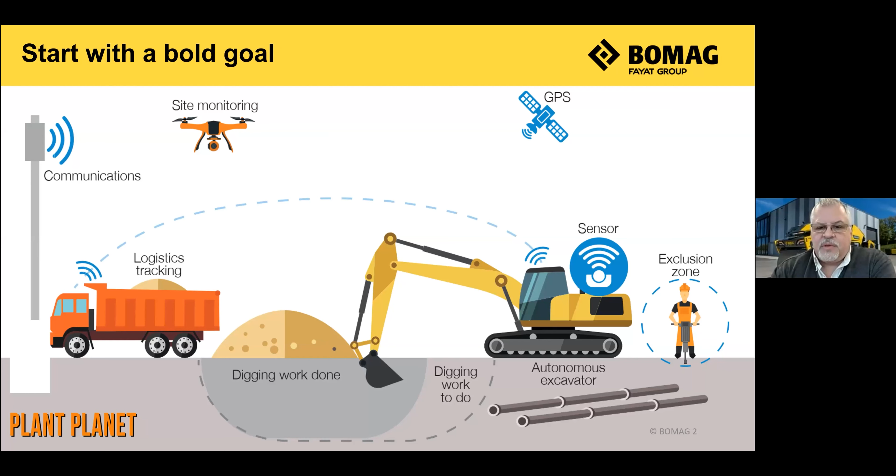In mid-2019, the construction industry and wider technology providers came together under the Highways England Connected Autonomous Plant Group. The goal is to make the site of the future a reality with a truly collaborative approach from all parties. With this bold goal also came a bold statement: the goal is to have autonomous sites as the norm by 2035 in the UK. This is a bold goal that can be made a reality.

The roadmap to the Connected Autonomous Plant goal was published in the summer of 2020. Some extracts are shown here. The ambitious target and goals along the way are set with key milestones identified. The cooperation of authorities, designers, manufacturers and contractors have made this document possible.

To understand the reasoning behind the CAP goal, several key benefits were identified. Efficiencies from enhanced machine control are well documented, proven, and adoption is increasing, but not yet the norm. Quality can be an easy gain, as it is not just about the quality of the job, it is the reproducibility and consistency of the results. Here automation can make a big impact with repetitive tasks. Speed gains in modular and off-site assembly are clear, as well as utilising advances in technology to improve efficiency on-site and reduce the rework required - the right first time approach.

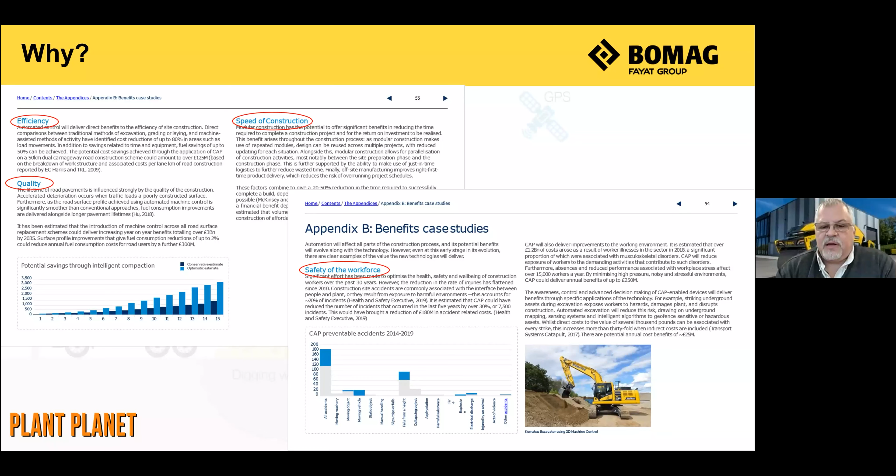Most importantly, and as we will see with auto braking, safety on the work site can be a huge benefit. Lastly, a point not shown in this section is that semi-autonomous and autonomous machinery can help address the shortage of skilled, experienced operators that is going to become a big issue as the number of mega projects in the UK increases.

Two weeks ago, TRL launched their recommendations for an off-highway automated vehicles code of practice. This is the next step in the CAP project. They held a webinar to introduce it to the industry, and it is now available to download and consult with online.

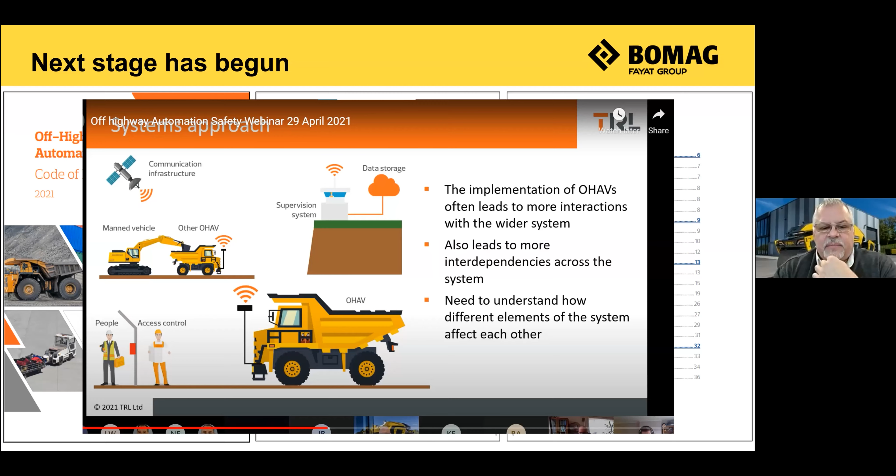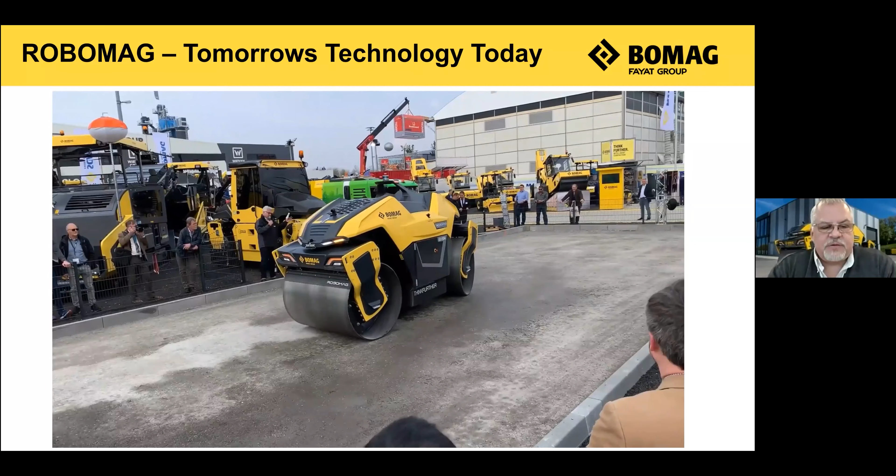Technology and the ability to build autonomous machines is already here. The concept of ROBOMAG, the machine you can see here, not only brings together sensor technology and GPS, it also brings autonomous compaction control of the drum, a technology of today. This is the debut of ROBOMAG at bauma 2019, and here it is working in autonomous mode with a geofence boundary set for safety. So this machine can run as a remote control unit, it can run semi-autonomous where it's told what to do, or it can just be told, this is an area, compact it to the maximum, and then finish. It's a concept, but it's using technology that is available and working today to prove that it can be done.

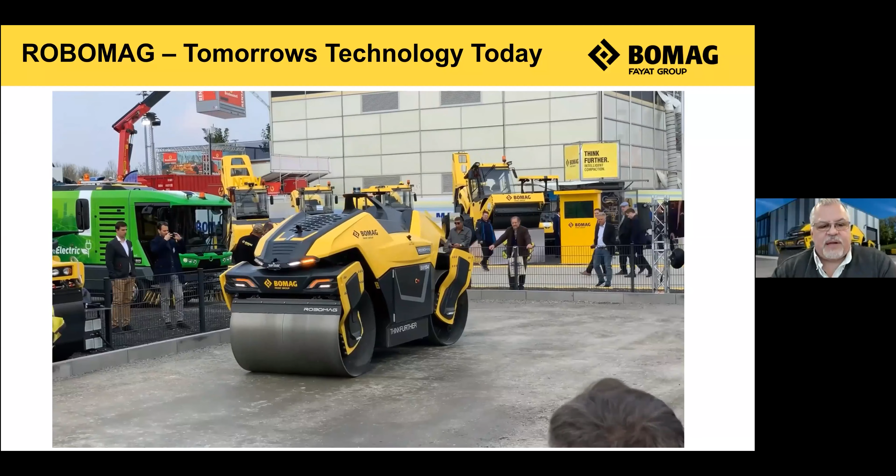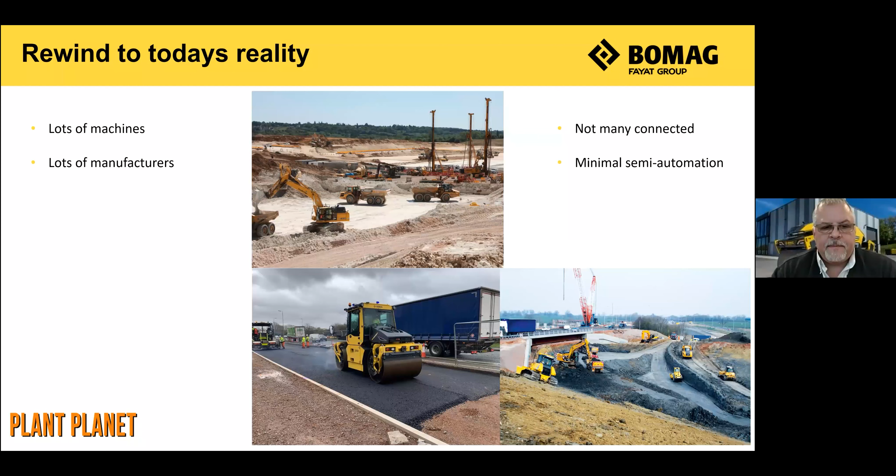To put the future in perspective, we need to know where we are today. So lots of manufacturers on the site, lots of different machines on the site. Very few of those machines are connected, and there's minimal semi-automation on some of the machines. For compaction, which is what we specialise in, the systems are method spec - basically tables that were written in the 50s and 60s, and this is how it's worked. There are few operator aids and very few results are recorded, and very few machines are connected.

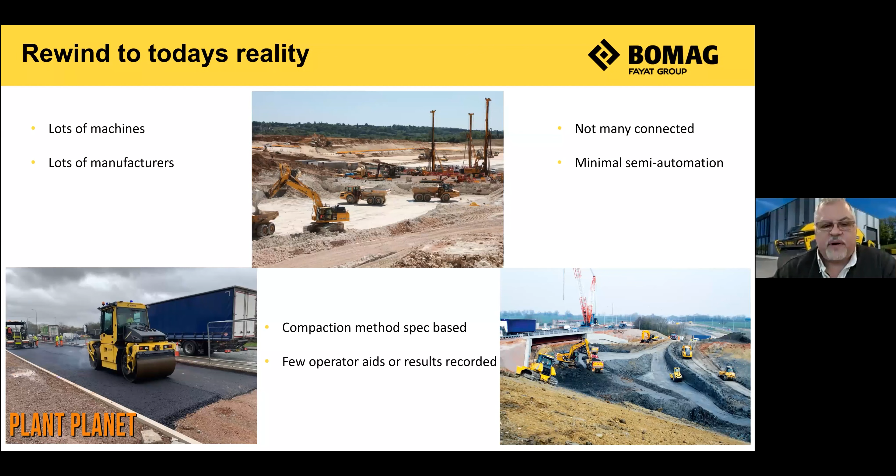The Highways England raised the bar statement that made 3D machine control compulsory to be used on major sites was a major factor in the increase of technology adoption over the last few years.

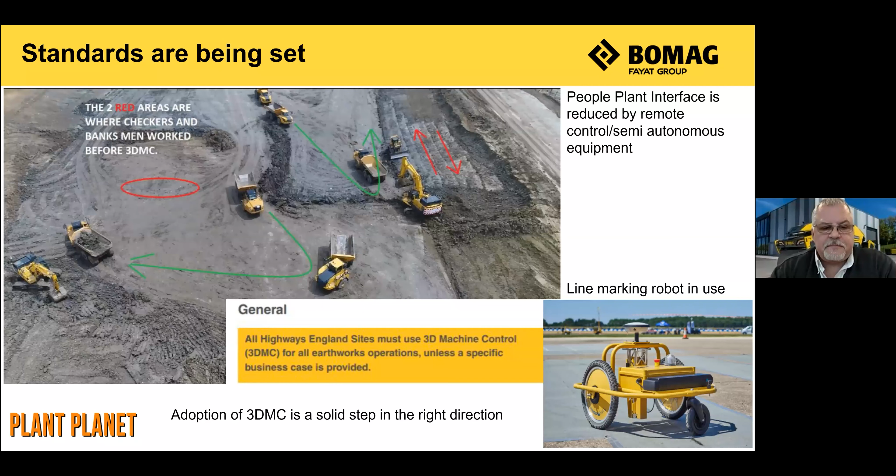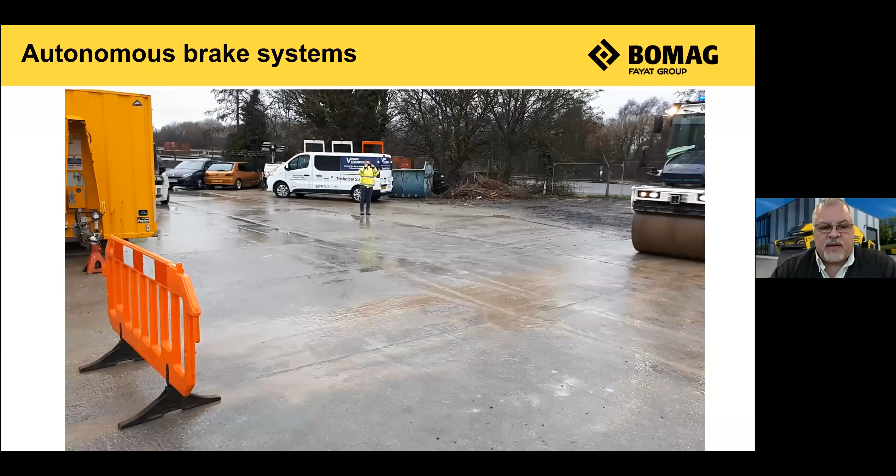Many technologies and ideas need to come together to make automation a reality. Safety can be a key gain, as can be seen here. The operator was unaware of the tyre coming his way. The barrier was his intended target. The roller was still accelerating as a sensor picked up the tyre and halted the roller in a controlled manner.

Various sensors such as radar, as used here, LiDAR and AI-assisted cameras can be used to achieve this, or indeed a combination of sensors.

Autonomy is only one part of the process to achieve the bold goal. Connected machines, big data, telematics, and IoT are all key.

The gains in efficiencies from digital displays for operators and the automatic recording of data are well proven around the world on all types of machinery. On compaction machinery, not having them is like asking you to walk up and down an imaginary line on rough ground precisely, forwards and backwards, while counting all day long with your eyes closed.

Having the data live via the cloud is key to being able to make on-the-fly adjustments to the way work is carried out, and can mean a reduction in the number of site tests, which again removes people from danger.

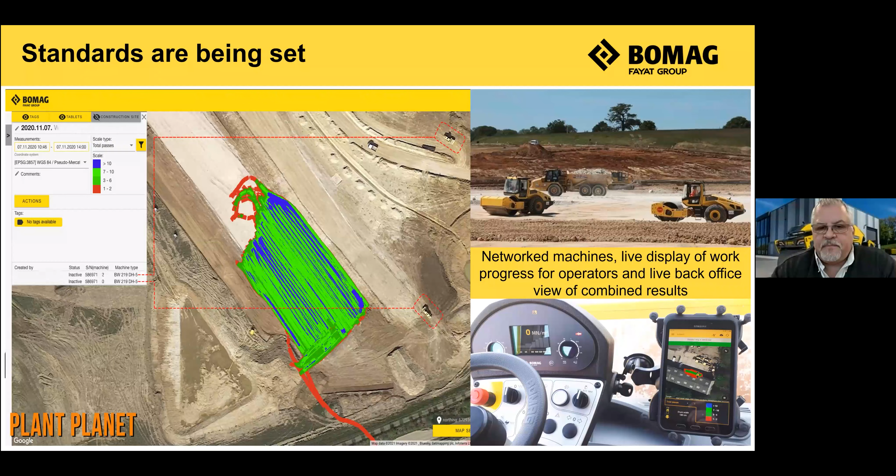The standards are now being mandated, as we've seen, giving efficiencies by taking control or guiding some elements of the site process. The previous slide showed a connected site, and here are a selection of data maps gathered from working sites in England.

As a minimum, a visualisation of the work progress for operators, as well as the automatic counting and mapping of passes, is being used. The operator is then left to concentrate on rolling the correct area, and in tests around the world, a 20 to 30% saving in unnecessary passes has been achievable.

By using connected digital recording of site data, it is being shown that the amount of tests the technician has to physically make on site can be reduced, again removing people away from danger.

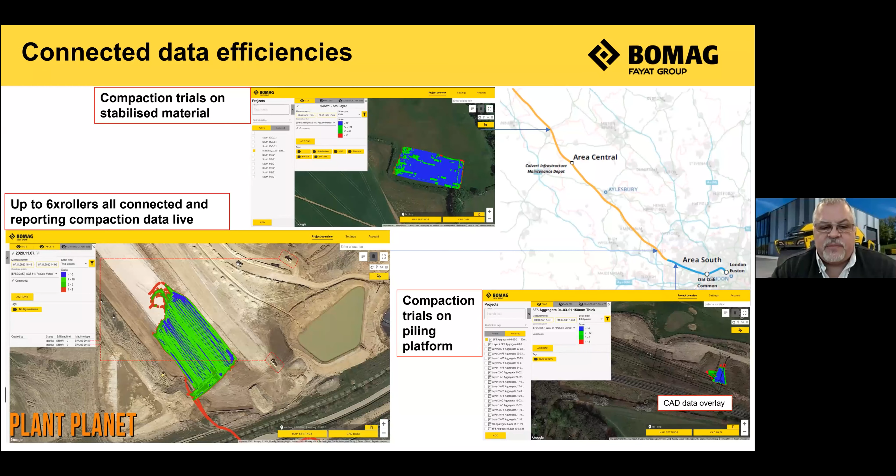It isn't just on mega projects that automated and connected data collection and visualization can make a difference. With intelligent compaction on asphalt, as can be seen, the operator, site supervisor, and back office can all see the site as it evolves in real time.

And once again, coupling this data with automated testing technology means on-site testing can be reduced, again removing technicians from harm's way.

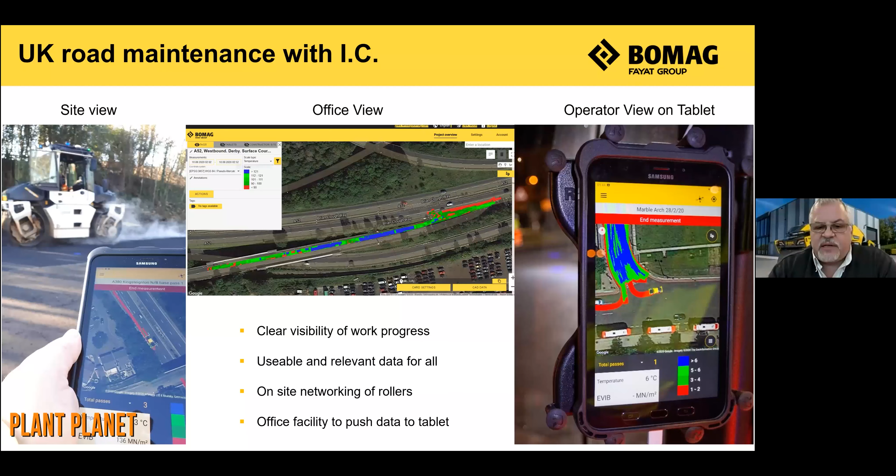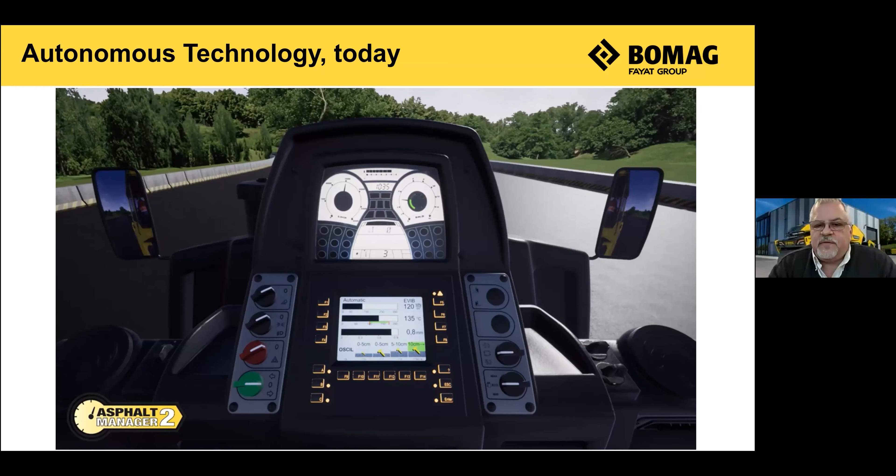Autonomous technology doesn't mean that we have to wait for the future. The elements are already in use today on asphalt with autonomous drum control.

Here, the operator selects the layer thickness, and then the sensors pick up the material stiffness and adjust the compaction energy to suit.

Again, this leaves the driver to concentrate on the surroundings he's working in and also hitting the right lines for his rolling. So here the machine senses the stiffness of the ground and either increases or decreases the force to make the ground stiffer or to reduce it so it doesn't over compact. Again, this reduces failures and increases the speed of work.

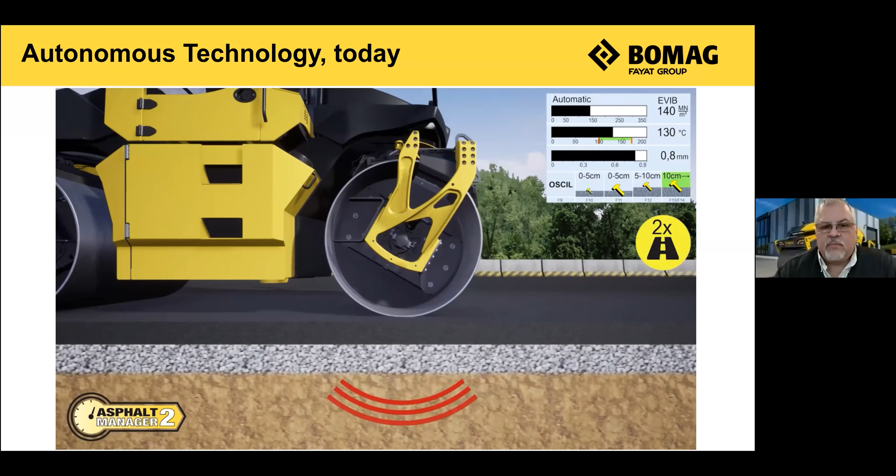And the same with earthworks. The operator sets the target level that has been identified by prior testing, and then the sensors and drum take over, autonomously adjusting the compaction force depending on sensor feedback.

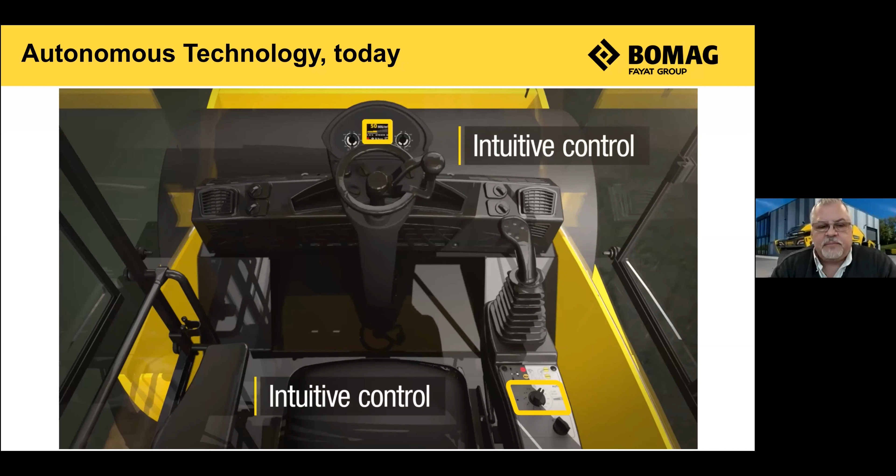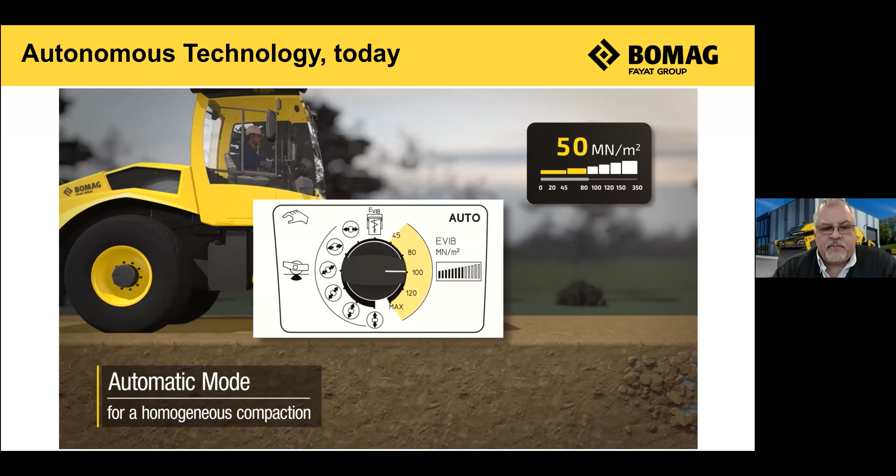These autonomous technologies mean that the productivity gains and consistent quality gains we associated with autonomy are already here. Here the drum is automatically changing the force, more or less, depending on the ground conditions, all automatically without the operator having to do anything at all.

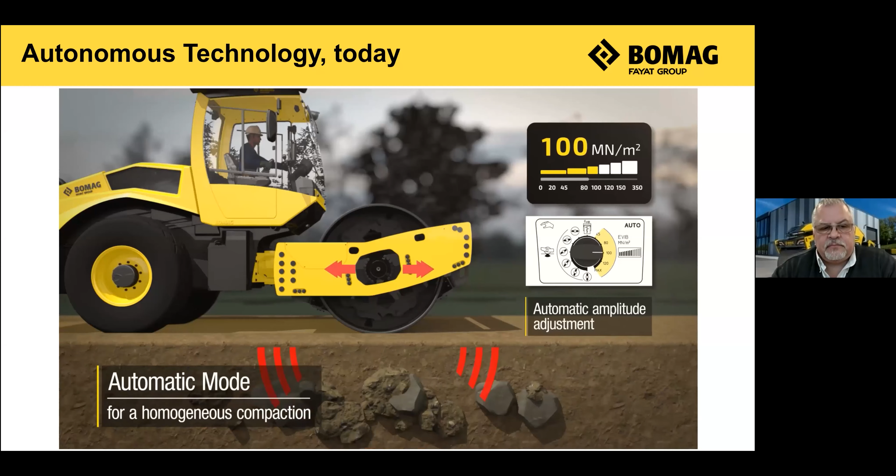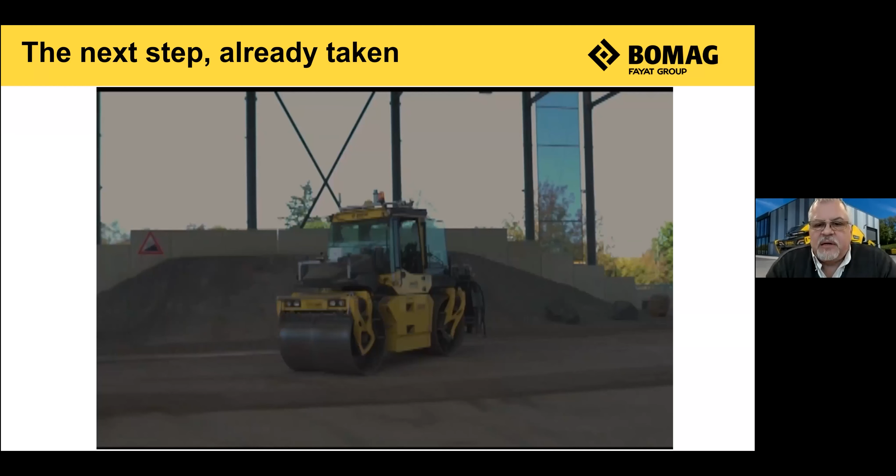Before I end, I would like to share this film of a study completed with the cooperation of many companies into connected autonomous plants, using the machines of today as a stepping stone to tomorrow.

So here's a standard roller, no different, doesn't look quite as advanced as BOMAG, fitted with a multitude of sensors and data.

And here it's been used in remote control mode, with no operator in the cab.

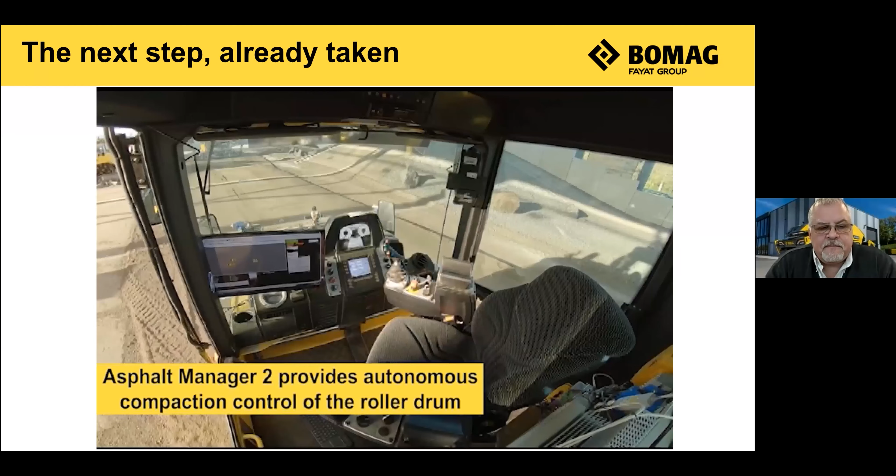The next step is semi-autonomous, where the driver drives it forwards and the roller then maps where it's been, and automatically reverses over exactly the same place.

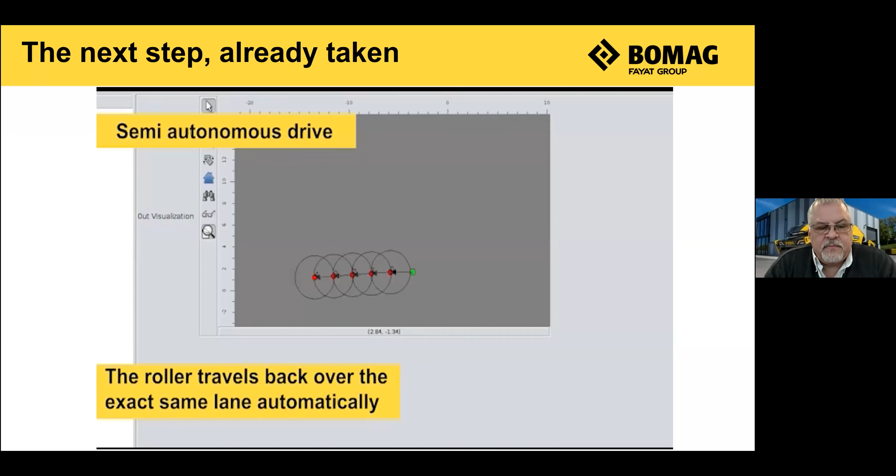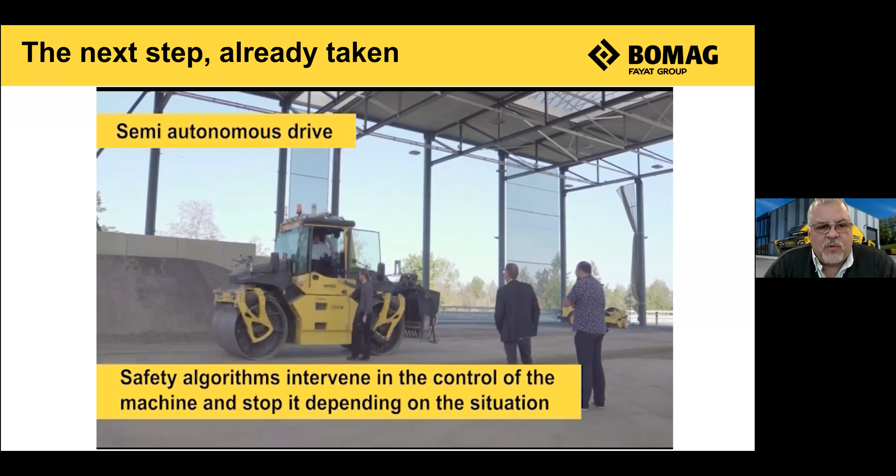And here's a safety feature. As the man walks up and touches the machine, it automatically stops.

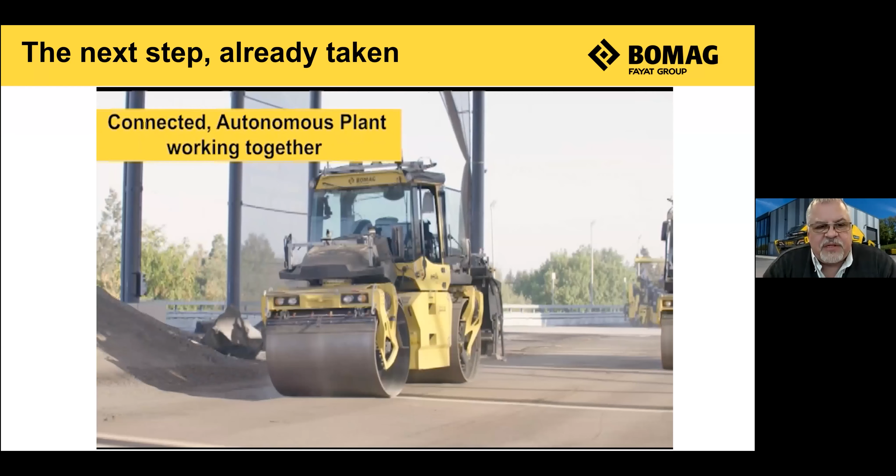And now, connected autonomous plant. The paver lays a mat of material. The rollers pick up where the paver has been and automatically, with no drivers on board, split the work between themselves.

And work backwards and forwards on their own, and all the data is reported back so it can be checked later.

So back to the start, back to the end of the game, which is BOMAG, the machine that's been built, that works. But in order to get there, we need to go on a journey, and we need to finish the journey. To start with, using today's technology today: 3D machine control, 2D machine control, operator site visualizations.

That can all lead to the plan for tomorrow, all part of the connected autonomous plant group: the remote control of semi-autonomous machines, dual use machines, and AI enriched performance. By then, hopefully we can realize the future, which is dedicated autonomous sites, artificial intelligence planning, and delivery.

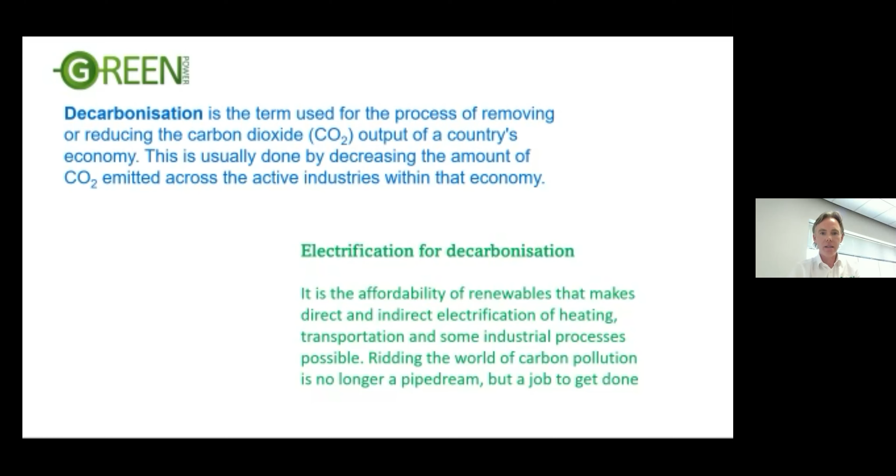Green Power Systems are the exclusive distribution partners throughout the UK and Ireland for the Xelectrix Power range of battery electrical storage manufactured in Austria. No electrification strategy can succeed without battery storage.

The key is designing a strategy that suits the specific needs of each business, and this is where we aim to help both individual businesses and the wider sector.

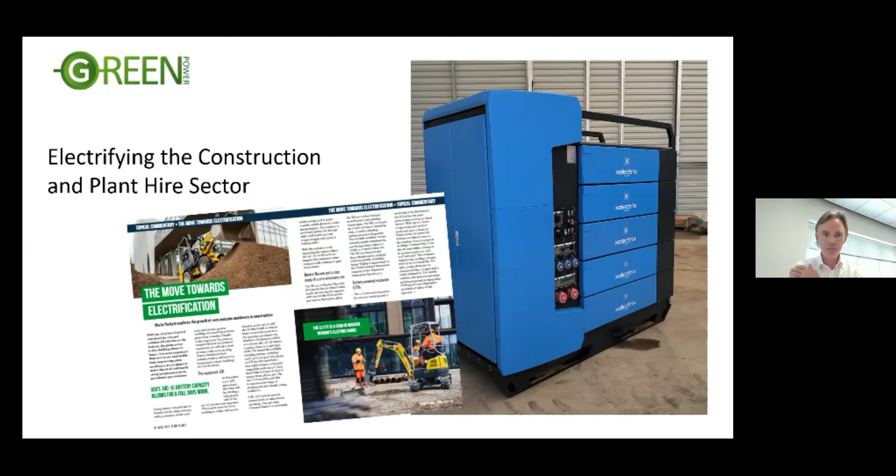The construction site of the future is a concept that we have been working on for some time, and while there are many considerations to what contributes to the carbon footprint of a construction site, how a site will operate effectively with reduced emissions is one we believe is no longer a question for the future, but is a real and immediate requirement. Two solutions we can use our technology to deliver today are those of diesel generator hybridizing and construction equipment charging.

Effectively hybridizing a diesel generator means several things, from being able to downsize the generator and still get the same results as far as power outputs, while also achieving reductions around runtime, fuel consumption, noise, and exhaust emissions, makes this a very attractive solution for an increasing number of sites.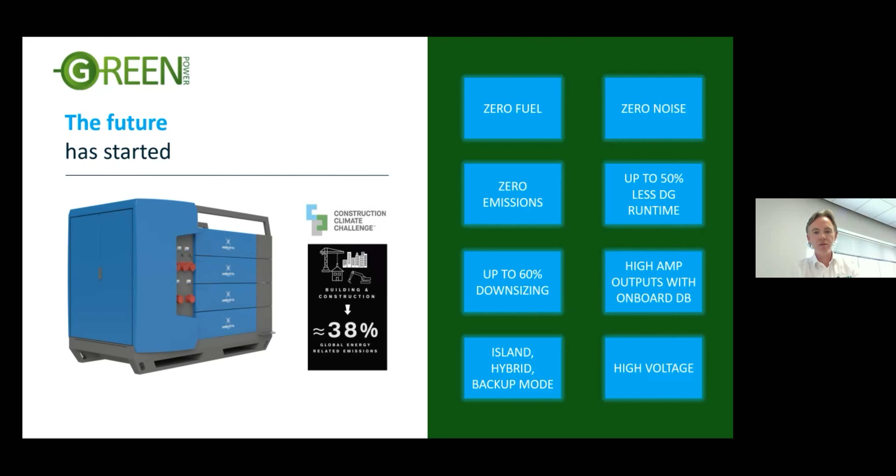While hybridizing diesel generators is not a new concept, and it is something many operators will be familiar with, capability around our unit to support high voltage and high amp inputs and outputs, combined with the inbuilt distribution board, means many more applications can now be considered when deciding when a diesel generator can be hybridized.

By stabilizing the load curve, we reduce the consumption of fuel per kilowatt of power produced. The peak power boost feature means that we can add the power from our battery storage onto the maximum power output of a generator to meet higher consumer requirements without increasing the size of the generator and the associated financial and environmental costs.

As OEMs increase the size and number of their product ranges that are powered by purely electrical means, and end users' desire to use this new equipment grows, we expect difficulties to arise around how the infrastructure to provide the power to an increasing population of units will be developed.

It is unlikely that the grid alone will be able to provide the necessary power, and certainly not at peak times. Therefore, we recognize that battery storage of this type, with its plug-and-play flexibility and scalability, will play a key role in facilitating a transition from diesel-powered equipment over to electrically powered equipment.

In this example, Xelectrix teamed up with Volvo in France, where for one week, a ProBox unit was used to provide the power for an excavator and dumper on an off-grid island mode basis. As no mains grid power was available, this was done using an 80 kilowatt inverter with 140 kilowatt of batteries, and the onboard transformers, another feature of this unit, allows us to form our own grid.

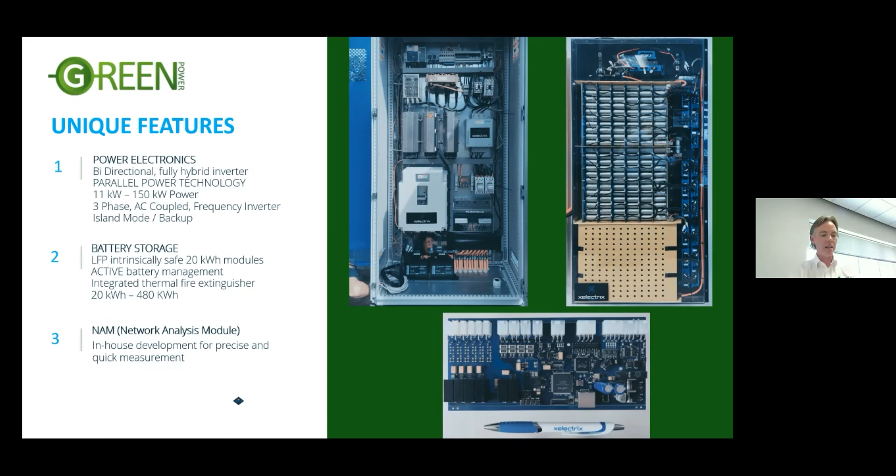The wide range of unit sizes ensures we have the right size for any application and the ability to grow with sites as their own capabilities around electrification develop.

Our partners at Xelectrix have developed some very sophisticated software tools to help us understand individual applications and analyze the specific requirements, so we can then propose the most suitable solutions. From understanding the size of the generator, we can either produce our own load curve or take one from the client and analyze the data to be able to feed back what reductions we can offer in terms of generator sizing, runtime, fuel consumption, and CO2 output, complete with information on the ROI calculation.

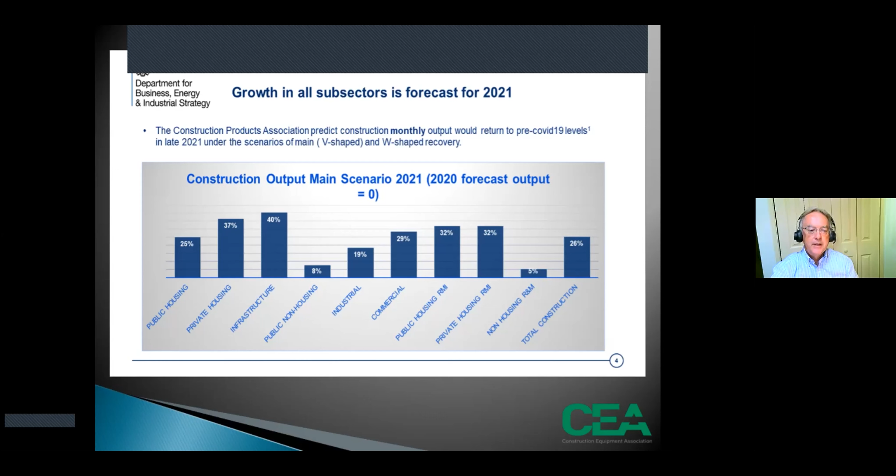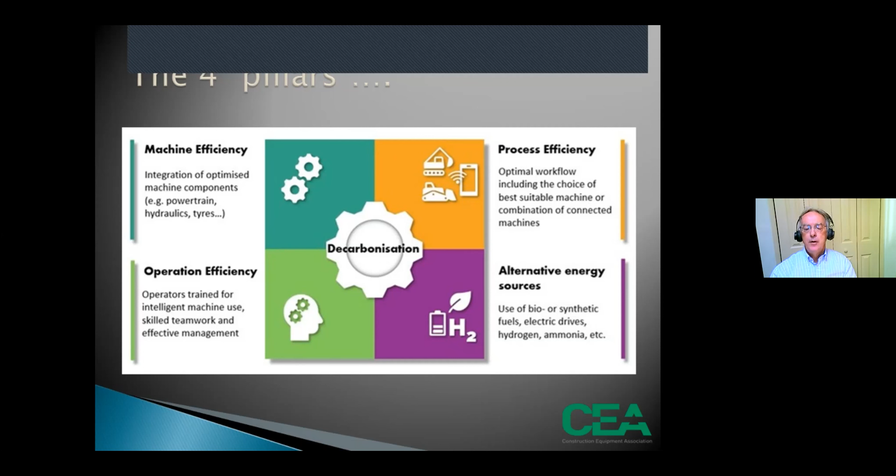The assessment is based around what we call the 4 pillars. The bottom right-hand corner deals with alternative energy sources. We're talking about electric drives, biofuels, and in particular hydrogen, where I think there are some very big opportunities. But when you go to meetings, as I do, and this whole issue of decarbonisation and sustainability comes up, the suggestion that electricity is the be-all and end-all is not quite right. It's very important, but it's only a quarter of one of these 4 pillars.

The 3 other pillars, which you can see from the slide, first deal with machine efficiency - how you put the machine together and how the different components can be optimized and work together. That in turn relies on a certain degree of digitization, with the different components effectively communicating with each other. And of course, the bigger picture is the whole manufacturing process and what the carbon footprint may be - you have to look at the holistic view of the environmental impact.

You then get to operational efficiency. That is very much to do with operator training, where you have operators, and of course in the future, as we've heard, there may not be so many. But it's about encouraging and training those operators to get the full benefits of intelligent machine use.

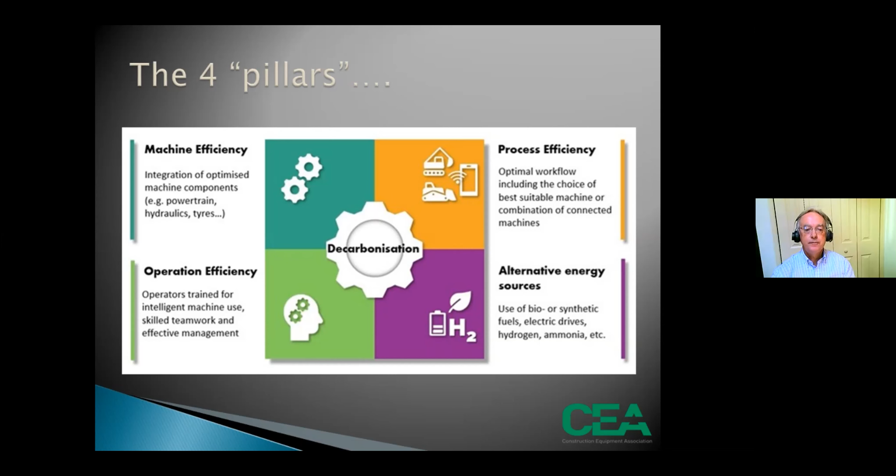Moving on, just almost at random, I had 5 pointers to what I've called the digital boost. Let's have a look at some different aspects that are going to be significant going forward. First one, again, that's been mentioned - when we left the EU...

It removed the possibility for us to continue with the same labour profile that we had for our construction sites. Our European guest workers - some will still remain because of the policies government have put in place to allow them to do that. But there's a general recognition that the numbers available to work on our construction sites going forward, particularly in a boom period, are going to be constrained. And if you look at some press reports earlier this year, that labour shortage is translating into higher rates of labour.

And as labour costs take off and get more expensive, that will mean the application of newer technologies will commensurately become more affordable - more affordable for two reasons: because the labour to capital gap is closing, but also as newer technologies are used more and more as standard, their relative costs will fall anyway.

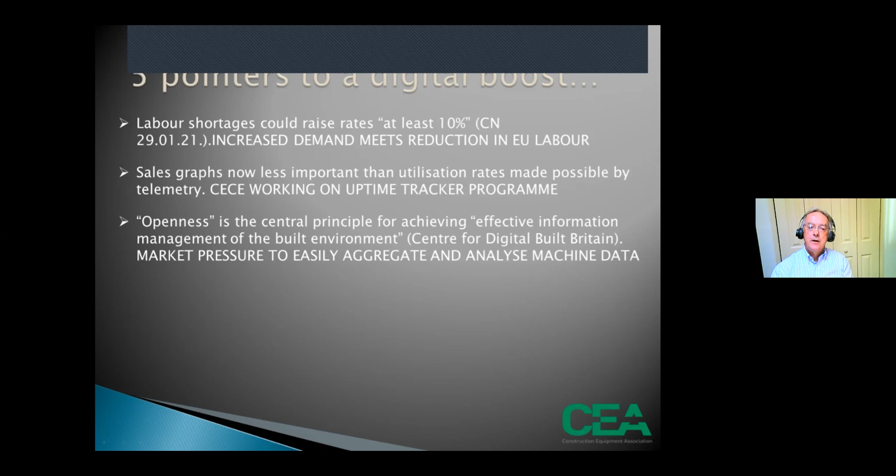The third area, again something I hinted at before, is a quote I've included from the Centre for Digital Built Britain: openness is the central principle for achieving effective information management of the built environment.

That has been a frustration in the past, where there have been some excellent systems introduced by CEA members and others, but harvesting the machine data from a mixed fleet has been a challenge. I think there's a lot of work now going on to mitigate that. But in the same way that, in the past, it was only when we started to use the same platform that we could communicate between personal computers, and we had the digital revolution we've had in our own homes and households.

Number 4, and this is something close to home for the CEA, is quite interesting in terms of marketing approach: with the absence of physical meetings, physical trade shows and other opportunities for people to get together in our business, it's led some OEMs to take different routes to market. For example, there have been a lot of product launches over the last year where people hadn't been able to attend in person, but they were still done virtually, and in many cases very successfully.

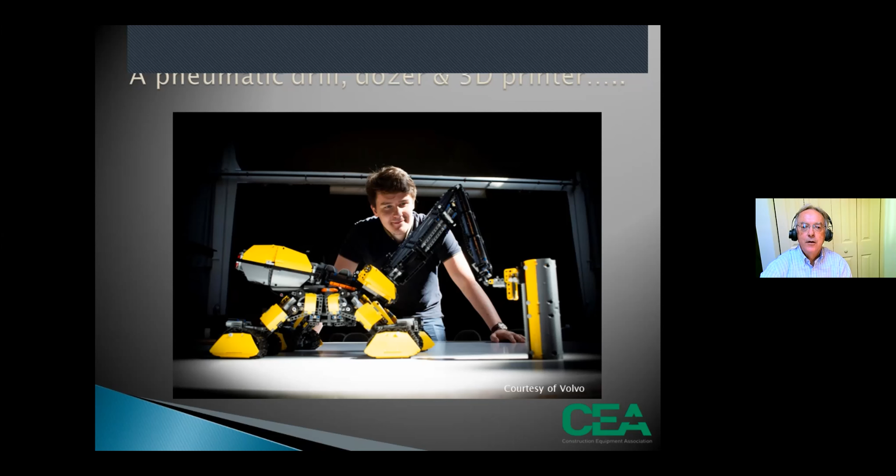So that's my final thought. The future is going to be interesting, and I hope you all have a very successful part in that.

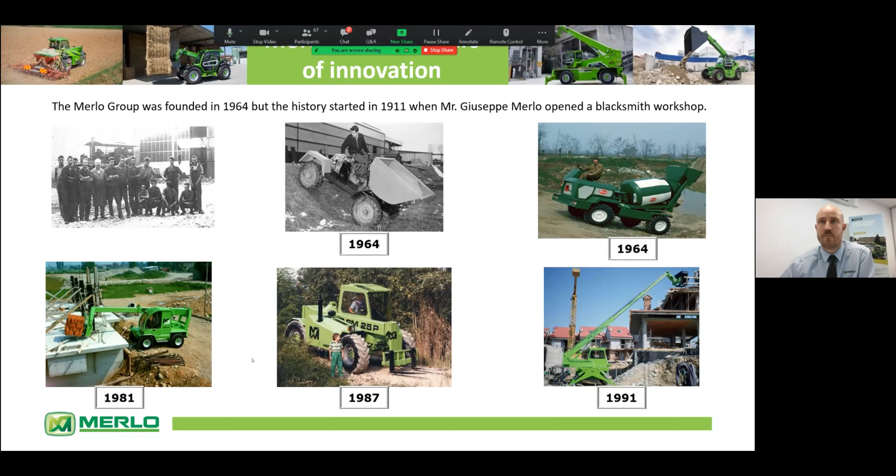In 2019, the evolution of construction products continued with the launch of a complete new panoramic and roto range, comprising 24 new models with completely new technology, concepts and design, ranging from the Cingo track loader on your left to the 35-metre lift roto on your right. I'd now like to take you through some of the advanced innovations and safety features in the range that we've incorporated to aid everyday working practices.

Adaptive Stability Control System, launched with the new range of construction machines in 2019. ASCS for short is a complete attachment recognition system equipped with an in-cab 10-inch digital display screen. Machine stability adapts the machine parameters to the attachments fitted and the working conditions. Through the use of genuine Merlo attachments, the ASCS system automatically adjusts the visual load chart seen on the digital display according to the load center of the attachment.

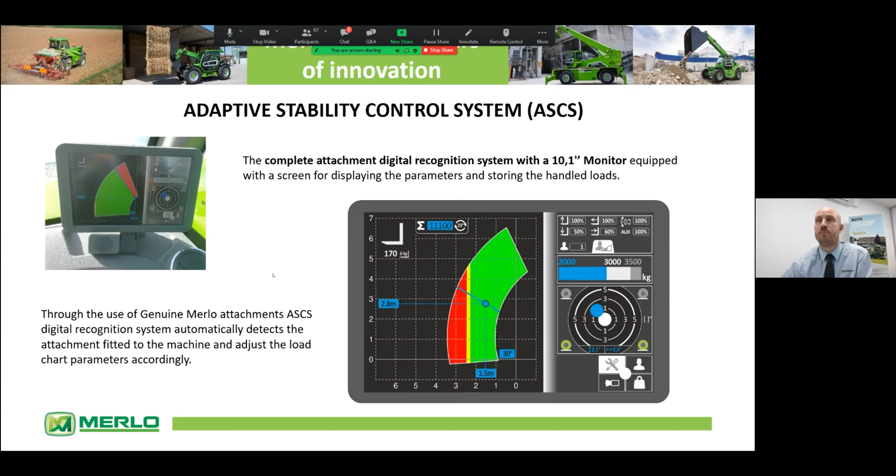For the recognition of the attachments, there are magnetic sensors mounted on all attachments produced by Merlo that marry up with an additional sensor within the boom head. Once the attachment has been coupled to the machine, the ASCS system will update the cab display accordingly.

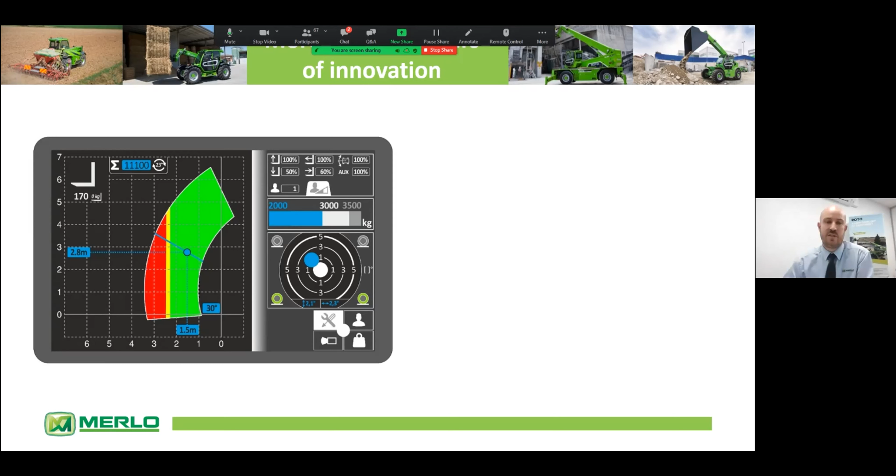The ASCS system is multifunctional and offers a number of additional features that make our machines the safest on the market and aid the operator in efficiency and productivity. Through the commands, it's possible to set the maximum movement speed of the boom function, giving the operator complete control for the most delicate applications when loading, but also the hydraulic speed needed to return the boom to its loading position.

On the screen, you will also see a load-bearing capacity indicator. In grey is the machine's maximum capacity, in this instance 3,500 kilos. In white is the maximum capacity of the boom in its current position, and in blue is the current weight of the load on the machine.

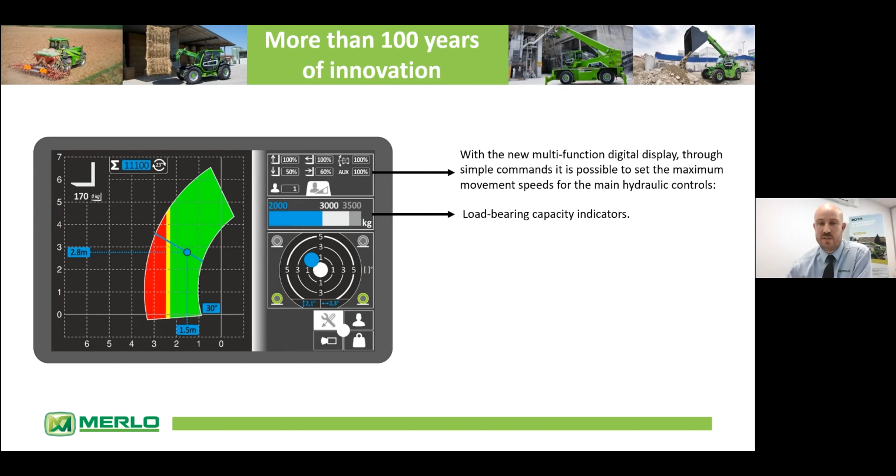This increases the efficiency to the operator in a number of ways. One, the operator can use the machine to calculate the load weight. Two, the operator can simulate lifts in advance to find the maximum load weight that can be placed at a given height. And finally, three, the operator has constant feedback on the machine's capabilities. Included in the display is a digital level indicator.

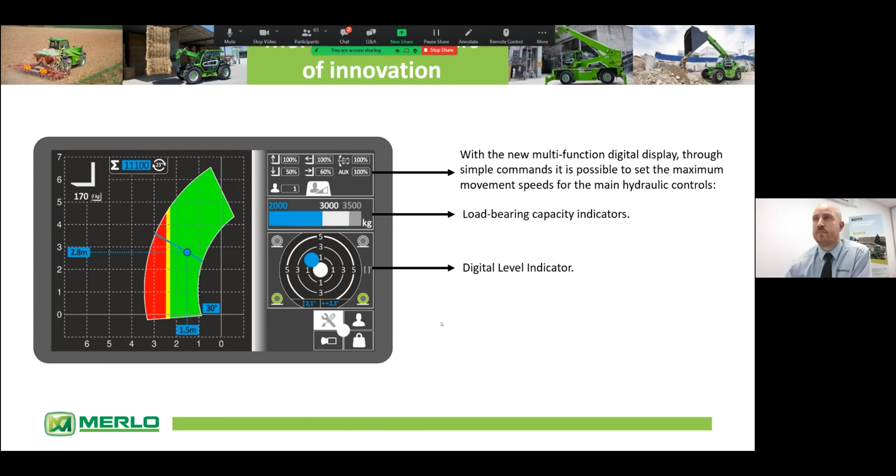In accordance with EN 15000, implemented across all manufacturers in 2010, variable reach machines are now required to restrict the hydraulic movement that could potentially position the machine in an unstable position. Unique to Merlo Panoramics is the virtual display of the safe working area and the assistance of pop-ups to aid the operator in returning the load to a safe position. This stability index is calculated from the attachment recognition, the load position using boom angle sensors, the extension of the boom, and finally the load weight.

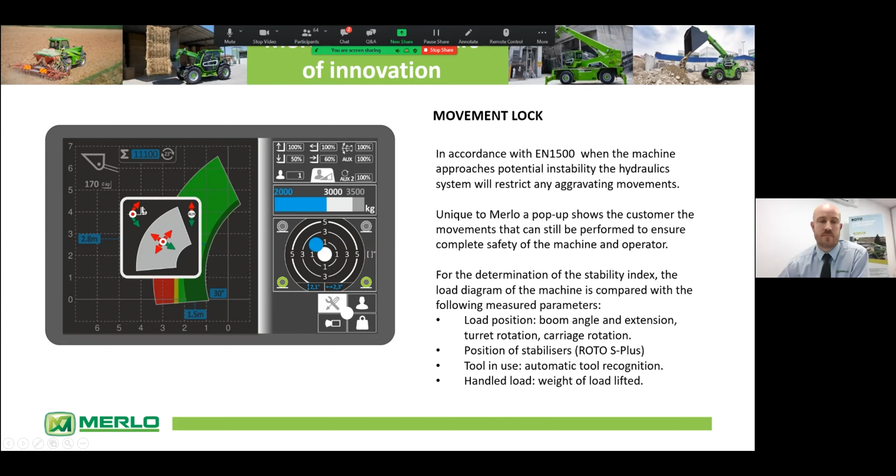Moving on to the roto range, the technology advances even further. Not only do you see the vertical and horizontal load chart, but in addition you have a 360-degree bird's eye view. This also allows you to set slew restrictions for the turret and the working areas for greater productivity.

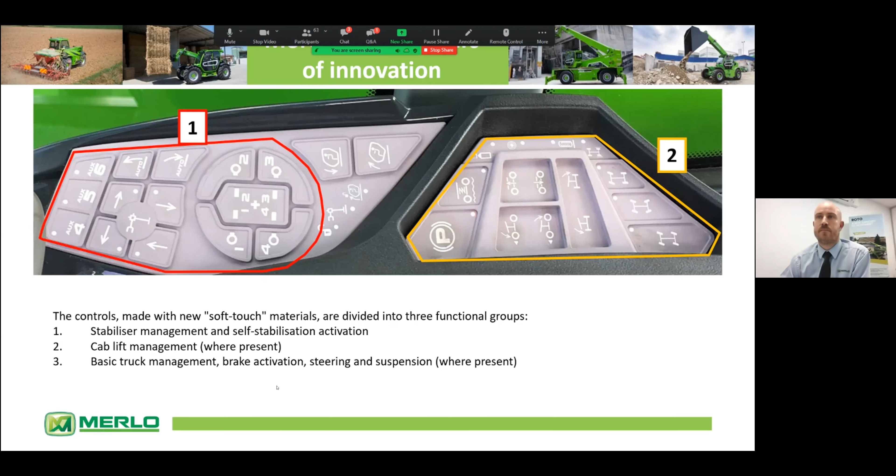New for 2021 is an upgraded Merlo mobility system. This is a service that provides geolocation and advanced telemetry of the machines. Merlo mobility will be offered at 3 levels from customer to dealer platforms with a variation of accessibility such as remote digital dash, telemetry of the machine, fluid levels, temperatures, anti-theft and maintenance planning.

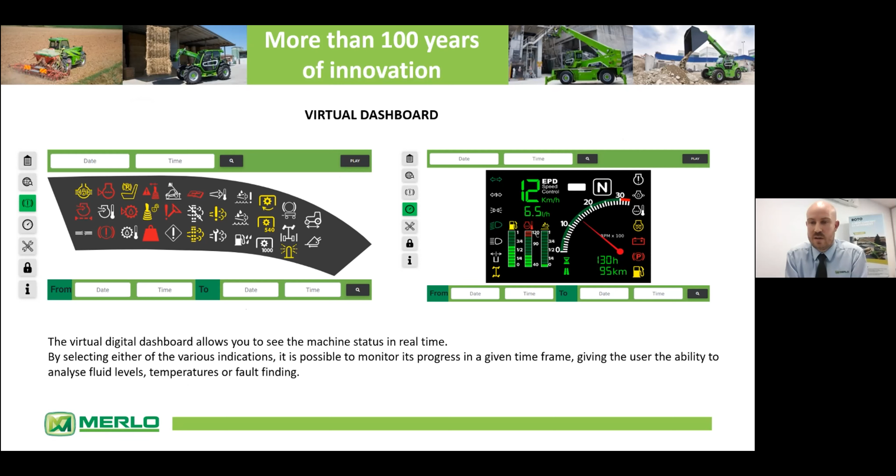Within the software, we have the virtual dash that gives you an exact replica of the in-cab display along with all indicators. It's possible to monitor the machine at any given time by selecting the on-screen indicators. Engine RPM, travel speed are all visible as you would see in the cab of the machine. Summary screens enable you to visualize the machine data and productivity, kilometers traveled, hours worked, fuel consumption, and the modes of use such as idle time, lifting and loading, or traveling.

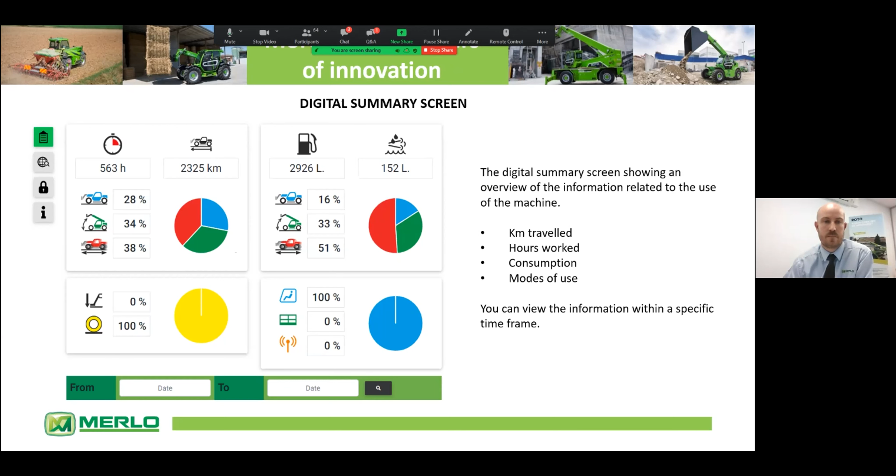Finally, the Merlo Mobility gives you a platform to manage your fleet maintenance by showing the hours of each machine in the fleet and allowing you to set scheduled maintenance reminders. The system also stores historical maintenance data.

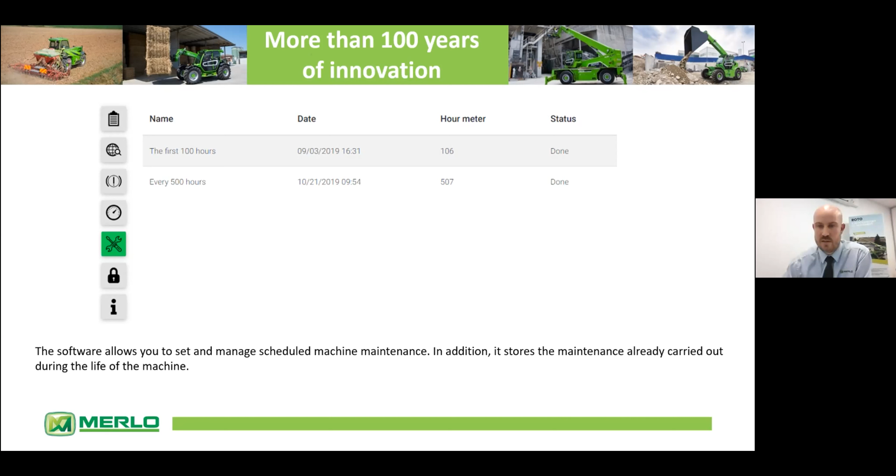This software will be available towards the end of this year. Moving on from Merlo Mobility and on to new products.

Coming soon this year to Merlo is the new e-worker, which is 100% electric. The e-worker will come in 2 versions: one will be a 2-wheel drive and the other a 4-wheel drive with a lift capacity of 2.5 tonne. This machine will have a true 8-hour working cycle with lead acid batteries, which will have a 9-hour charge time. This technology has no restrictions on the amount of charges like lithium. It's a proven technology as used in the industrial forklift industry and can be recycled at the end of life.

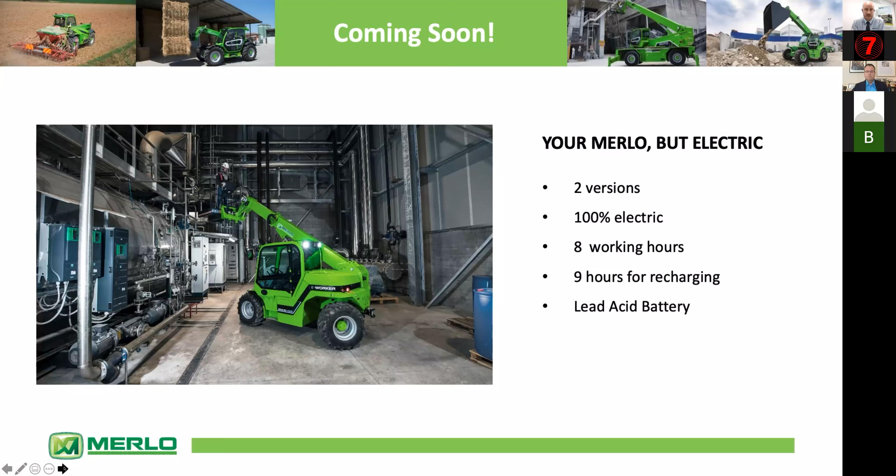If you want to find out more information on the e-worker, please visit our website at www.merlo.com. Thank you again for your time today. And finally, I'd like to finish the presentation with a product video on the Merlo construction range.

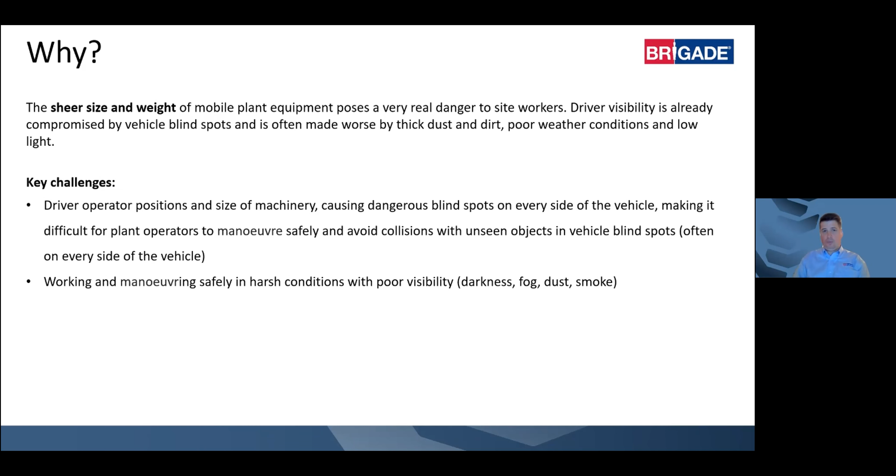What else do plant operators and plant companies have to contend with? Well, the increase of theft, criminal activity, and damage to their equipment, also working in harsh working environments. This can increase the ongoing costs for a plant operator with the assets they've got.

Because of the increase in noise on construction sites, many pedestrians and operators have to wear ear defenders. While this solves the noise pollution for the operator or worker, it also prevents them from sometimes hearing the old-fashioned tonal alarms when the vehicle is moving away or towards them. Because the noise can be barely heard through the ear defenders, it can lead workers to ignore the alarms at their own peril. So the option sometimes is to produce louder tonal alarms to combat this, and while this solves one problem, it can create another by drawing complaints of noise pollution from local residents.

And finally, there's also the conflicting and confusing industry specification standards. I'm sure you'll agree you've come across situations where what's acceptable on one site isn't always acceptable on another.

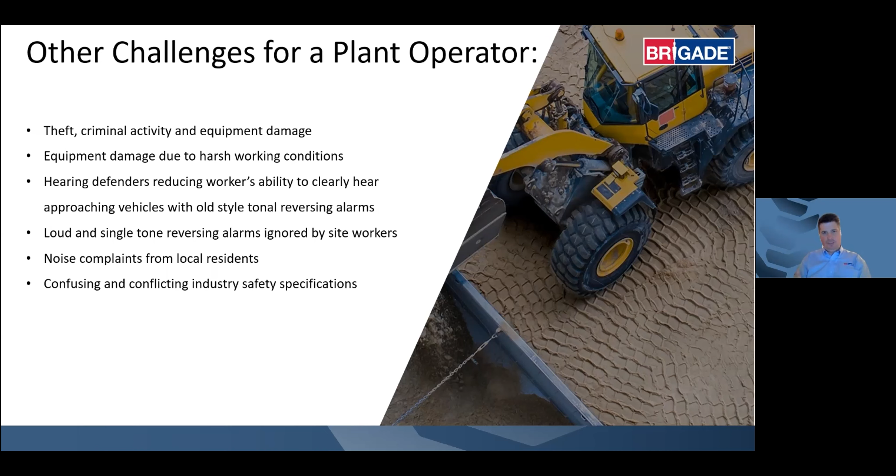So is there a solution? Well, yes, there is. There is the solution through the fitment of active and passive safety systems. Now, what do we mean by active and what do we mean by passive?

Just to give you an example, an active safety system would give an alert to the driver or to the pedestrian. This would be in the form of an audible alarm or an audio-visual display, working on an obstacle detection system to alert the driver or pedestrian that there is danger ahead.

What we mean by a passive system, well, this would invariably be something like a camera system. The reason why it's passive is it's dependent on the driver still being able to look at the screen to see what the camera can see and take the necessary action.

This can help contribute to reduce incidents, reduce accidents with plant and pedestrian, further reducing your ongoing costs for plant repair and insurance costs. And also, by choosing the right type of alarm for your vehicles, this can also help to reduce noise complaints.

This will no doubt help you with your health and safety requirements and also with compliance for your safe system regulations and legislation. But ultimately, this will improve your reputation as a contractor, as a business, and as an employer.

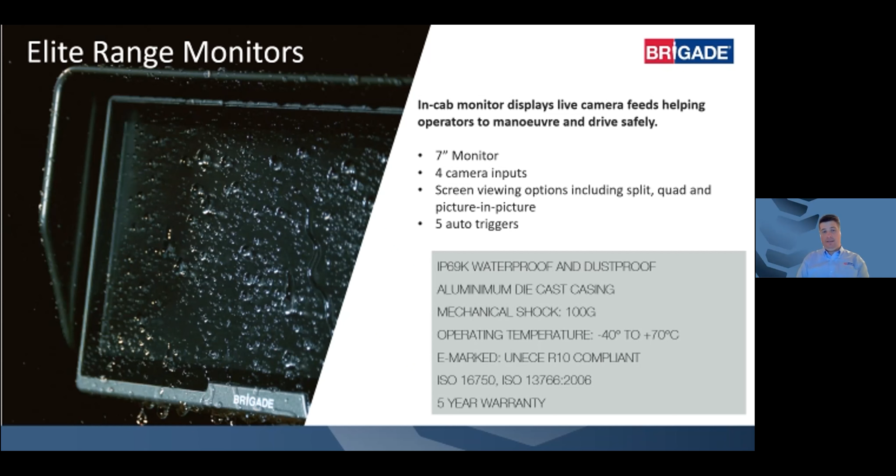As standard on our Elite range of products, they are tested and waterproof and dustproof to the highest ingress protection rating. They also have an operating temperature of -40 to +70, so they can work on any construction site anywhere around the world. They comply to regulation 10.5, which means they can be fitted as a line-fit product, and they come with a 5-year warranty as standard.

To complement our range of monitors, we have our Elite range of cameras, which can come as standard with variable lens sizes to enable you to see either a wide angle or a narrow angle for a more definition view.

They also have a wide dynamic range, which means that they can work in various different lighting levels, in shadows and also in highly illuminated areas. To work in darkness, they have 5 infrared LEDs, which give you ultra low light performance to work any time of the day.

You can have the option of standard or shutter cameras to protect the camera from any debris that comes across it when the camera is not in use. And the cameras also have a heating element, which enables you to get rid of things like condensation and fogging that comes on the lens with a lot of other standard cameras.

Like its monitor counterpart, it operates from -40 to +70. It also carries the same regulations and compliance, and it also has a 5-year on-site warranty.

Another part of our range of obstacle detection systems is our radar system. Now, we have 4 particular types of products, with 3 with a fixed detection length, but 1 with a programmable detection length, which means that you can set the distance and you can set the width of the beam pattern to suit any vehicle.

Our technology of radar uses frequency modulated continuous wave. Now you might think, well, what is that? Well, compared to other radars, which just send out a single pulse to detect where the obstacles are, ours is sending out continuous pulses every millisecond to give you a more accurate detection of how far you are away from an object.

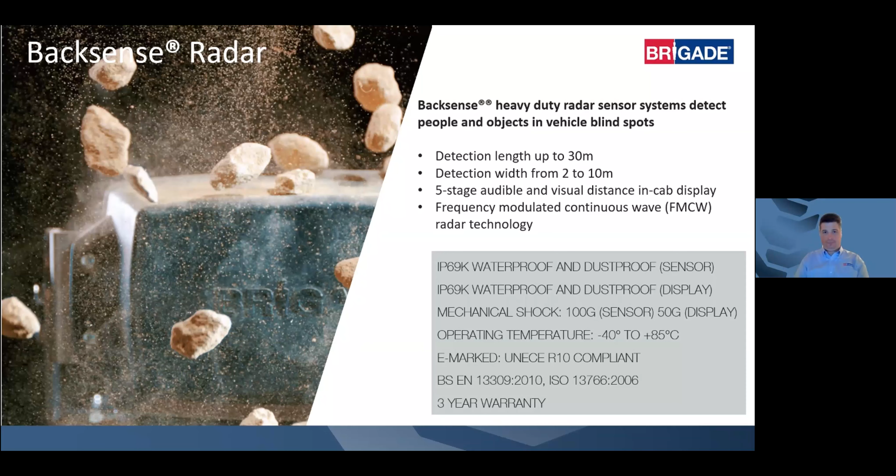Finally, we have our white sound reversing alarms, which are the safest alarm in the world due to their instant locatable and directional sound technology. What we mean by locatable is that when you hear a white sound alarm, you are instantly attracted to the noise, so you'll look in the direction the alarm is coming from, unlike tone alarms, which can be quite disorientating. The noise is also directional, so as the vehicle reverses towards you, the sound becomes much more pronounced and clear, and as it reverses away, the noise dissipates quickly.

It uses multi-frequency broadband sound and comes in 3 levels, 102, 107 decibels, but it also has a self-adjusting option of 87 to 107 decibels.

This is invaluable if you're working in a construction area located close to a residential area, because the self-adjusting alarm will adjust to the ambient noise around it. Put simply, if the site is quieter, the alarm will be quieter, but it will always stay above the ambient sound. If the site is louder, the alarm will be louder. This helps eliminate noise nuisance.

This product also comes with a lifetime warranty.

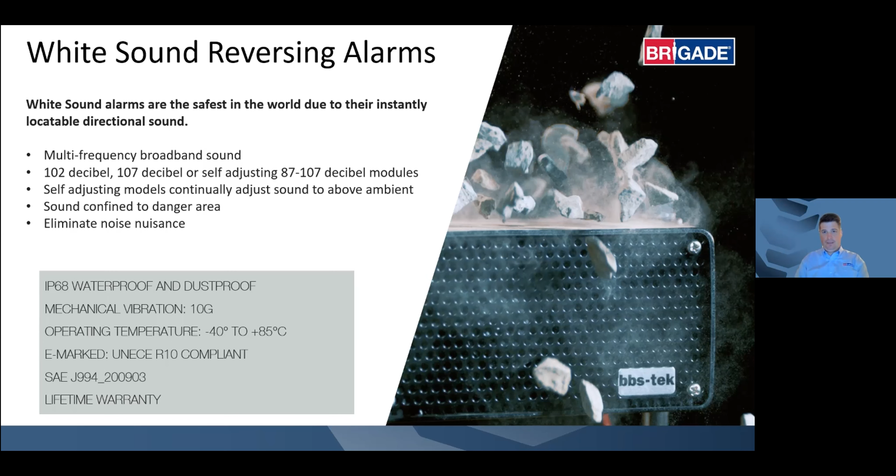Brigade have a philosophy of fit and forget. We want to be able to supply a product to you, whether aftermarket or a line fit, that will be a robust product for a robust industry and a robust terrain. So we make sure our products are tested to the highest quality to work in the harshest conditions, and as a result we can offer a 3, 5, and in some cases a lifetime warranty on our products.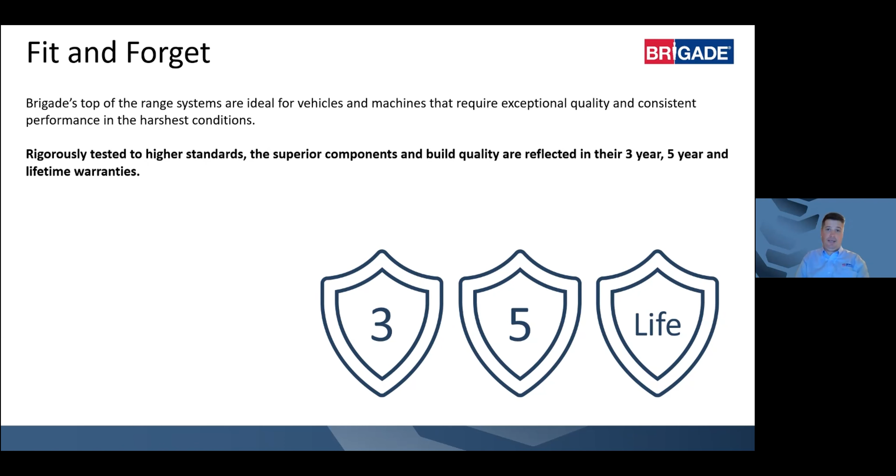There's an old adage that you buy cheap, you buy twice. At Brigade, we don't believe in that - we believe in supplying the best. As a result, we recruit the best engineers to work in our research and development teams to make sure we're always one step ahead of the competition.

Things to think about when looking for a prospective supplier for safety systems: with regard to fitting, is there a fitting service available? Is this fitting service able to provide nationwide coverage? How quickly can you access the product?

From Brigade's perspective, we can fit the product all over the world if required, and we can supply it to you ex-stock. We also give you the option of upgrading to on-site warranty if required, and provide dedicated after-sales support within the United Kingdom. We also provide online technical support through technical bulletins, technical support, documentation and online tutorials to help you with the product.

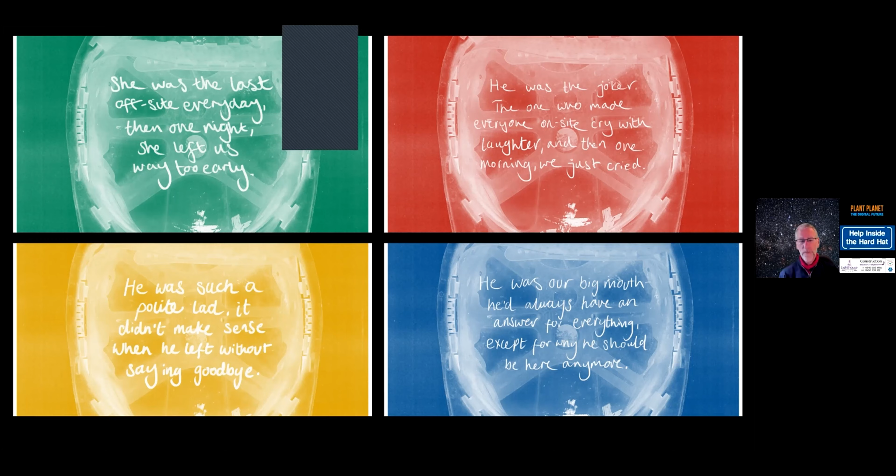We've even made the posters available so if you want to put your own logos on them before distributing to your sites or wherever, you can download the information and add your own logos. All of this material is absolutely free, available from our website, downloadable in artwork-ready, print-ready format for A4, A3, A2, or even hoarding size - all those different sizes available for you to use to distribute the message.

The other thing is we want to keep this free. It's really important that there's no barrier to entry for anybody to access these valuable services for support. To do that, we need your help - we need more company supporters. We need companies to say, we can afford 250 quid a year, or £1,000 a year, or £2,000 a year. We don't care how much, but we need companies to stand up and take some weight on their shoulders and help us with an annual pledge to keep this service absolutely free for everyone. We don't determine how much you can pledge - all we need is your annual support to help us plan and grow these services and keep them free for everyone.